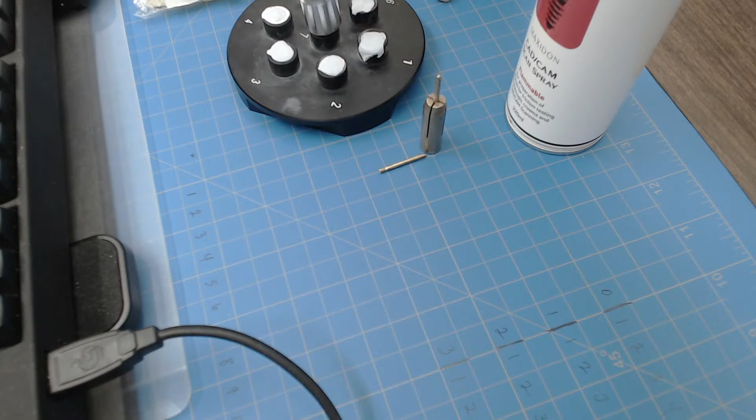All right, so this is the scanner that I have. It's the Freedom HD, a dental scanner. There's a rebranded jewelry version of this, but there's a pretty good markup. Basically, all the jewelry scanners are rebranded dental scanners, and they all come out of South Korea for some reason. So I just went with the straight dental version because I got the trade show price.

I think it was $15,000 two years ago. And really the main difference is the fixtures that you get. So I got all these dental fixtures and I don't need any of them, so I had to make my own. But the other difference is the swing on the arm.

So I like this one because the platform is stable and the camera moves. With something like the Elux, the arm moves and rotates, and if you don't have your piece fixed really well, it could shift slightly - though they have good fixtures, so it's not a problem. But this is more stable for doing stones, because it's hard to affix a stone and have it swing back and forth on an arm and rotate without some jiggle to it.

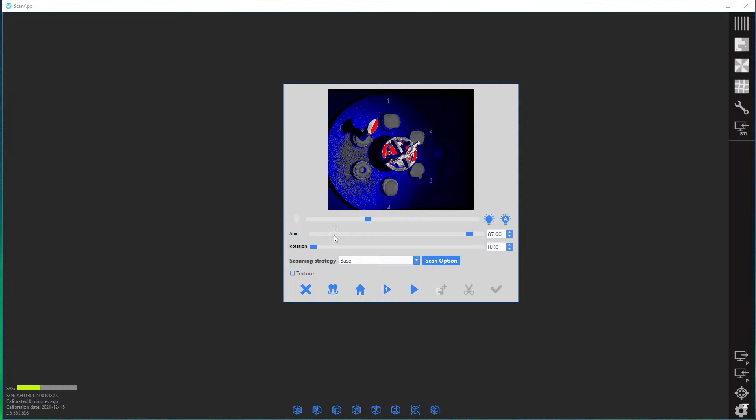And then the second number is your base rotation, so it will spin around. And you can see with having the extra field of view, even though I'm scanning this stone, I'm not taking anything away from the ring. So that's why I can do 7 pieces at the same time, and I just make my center one a little bit taller than everything else.

I just figured this out when I was first playing with it, and it works pretty good. I don't really go above 64 because once you get a top view of something, you pretty much have a top view of it. If I ever need an extra angle, I can take one, but we're just going to use my little base strategy here.

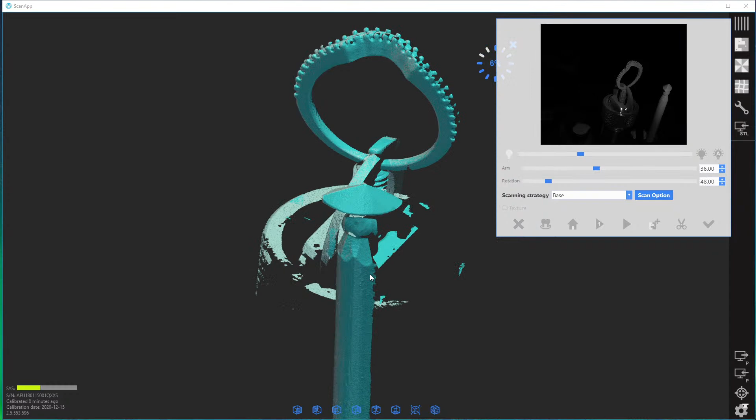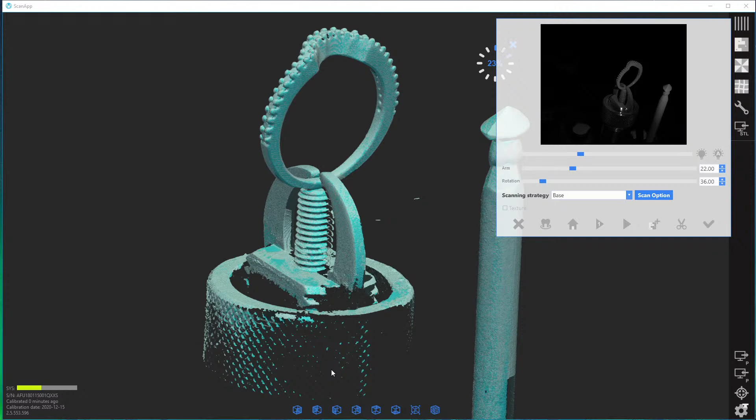This is scan once or do all the steps, so I'm just going to hit that button and then wait. Slide this over, and as it comes up, I didn't coat my little earring holder fully, so some of it's not going to show up because it's a reflective surface. Any reflective surface won't scan, only matte surfaces. That's why you need that Maxidon spray. So we're just going to let it go around.

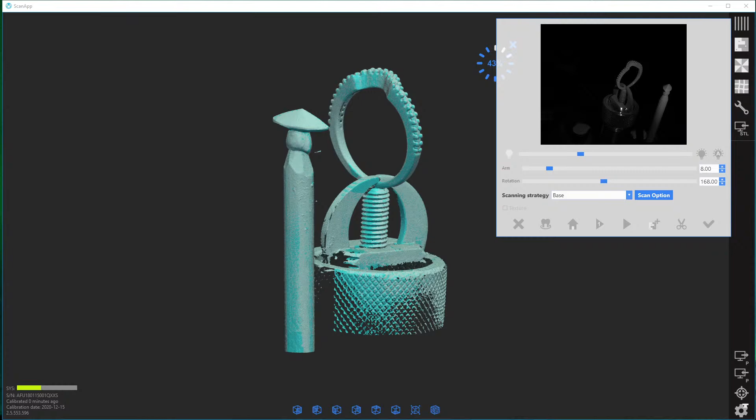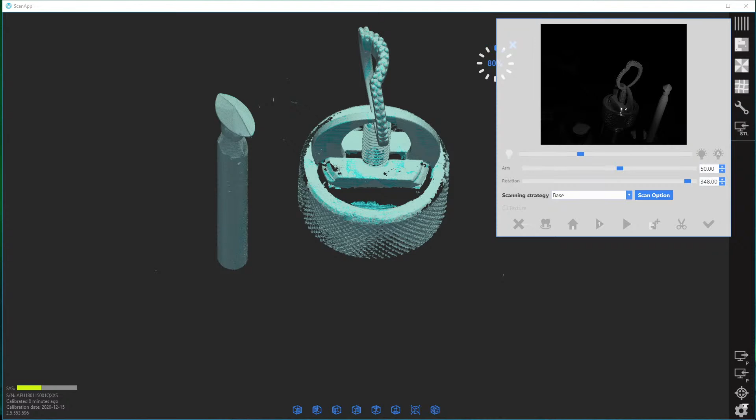Somebody there? In the stream, there's a problem with voice. Is it too loud or is it cutting in and out? Let me turn this on so I can hear myself. Hello? Oh, okay. I think the scanner... did it just start when the scanner started? Okay, okay, I understand what's going on. I'll try not to talk for a minute.

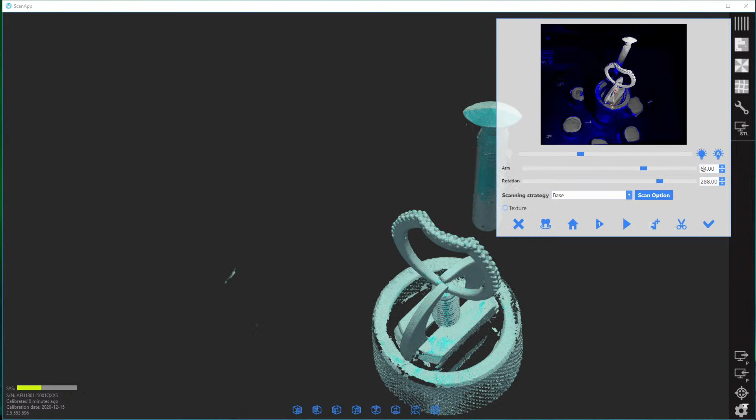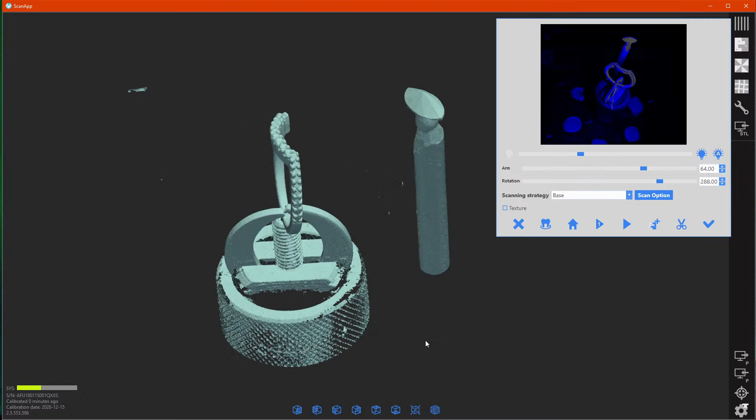You guys can see on that 64-degree angle, you're getting a pretty good top view here. All this little fluff that's showing up is because this is a reflective surface. If I would have fully sprayed down this knurled surface and the base, I wouldn't have these reflections causing these little scatter points to show up randomly out of nowhere. But it's not a problem in the long run, so I don't worry about it too much.

Because you're going to have to cut off your supports, which I'm going to do now. So I'm going to rotate this, and I'm just going to draw a line. Oh, I can't do that because I got two models in here at the same time. Cancel that. We're going to do it like this.

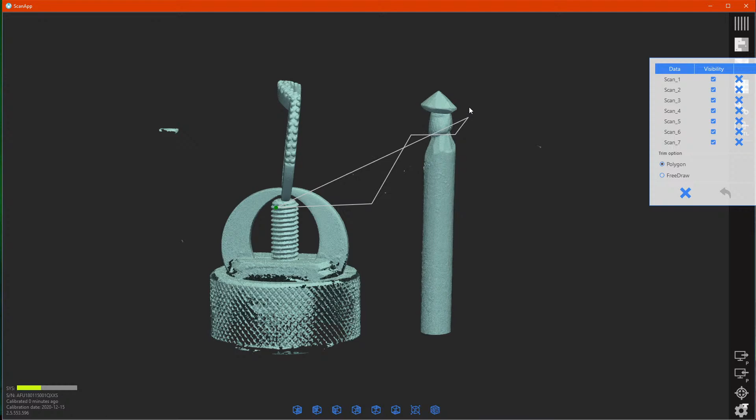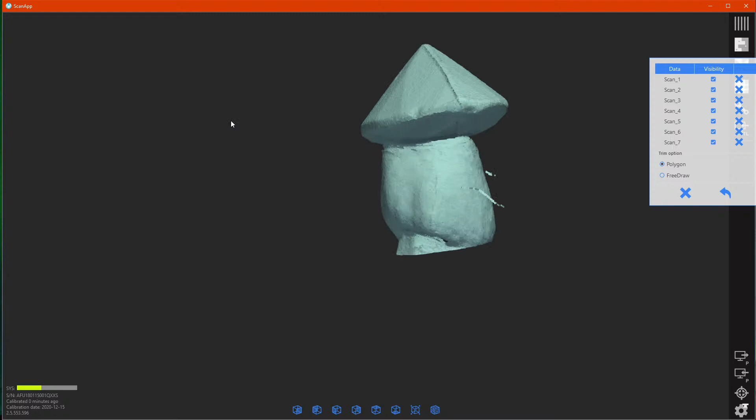I'm going to delete everything on the outside, and then I'm going to look at it. I've got some crud in here, trim the inside, and then I'm going to get in on this and try to get level with the table. Nope.

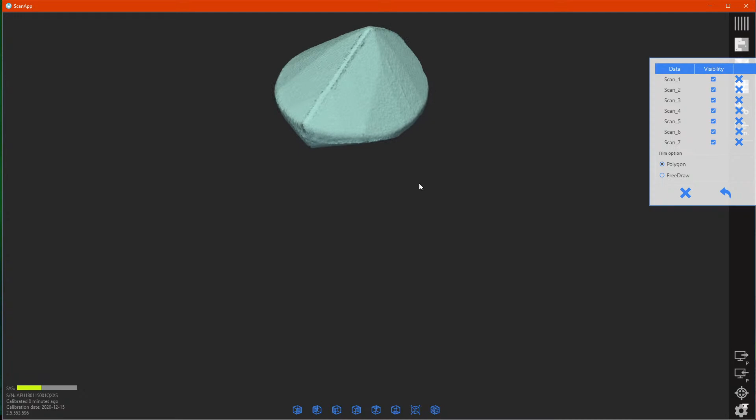Trim inside. And if I was careful, I would take and do that. You can see a little bit of where the spray left a cruddy edge there. It is a spray, it's not perfect. I was talking to somebody yesterday, let me give him a plug because he's a really cool dude.

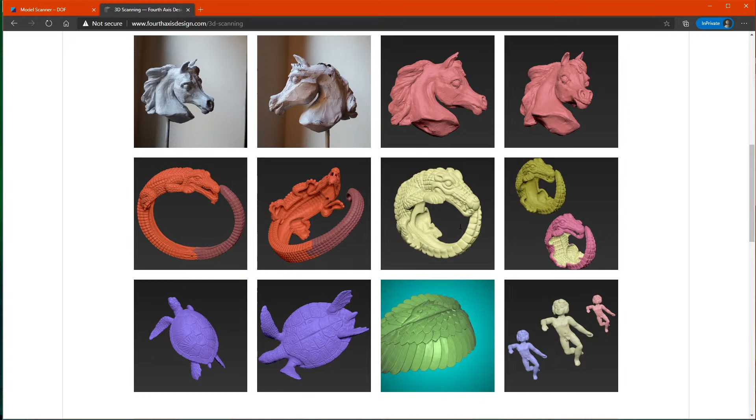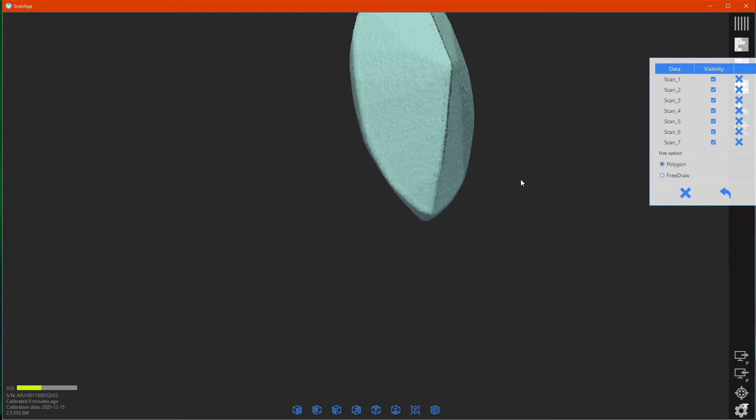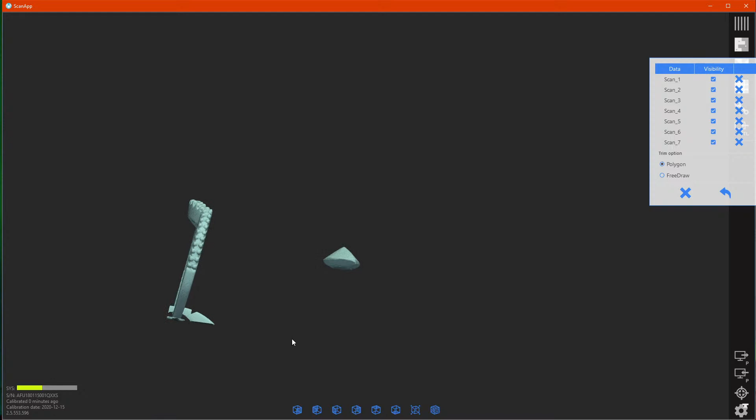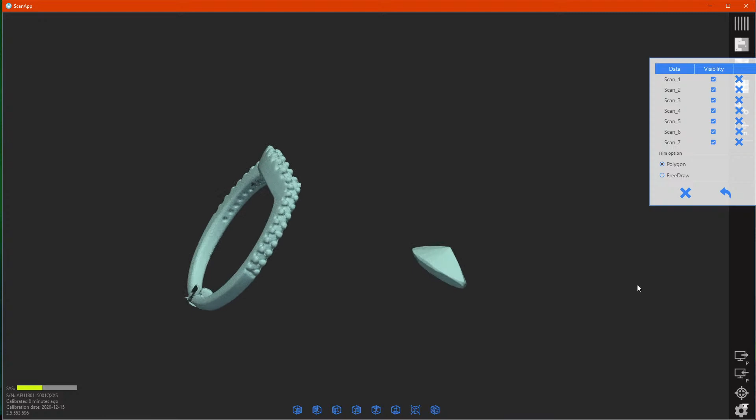Trim inside. And that's all I need because I'm just making a match to this, so I don't need any more detail. Done with that, done with that.

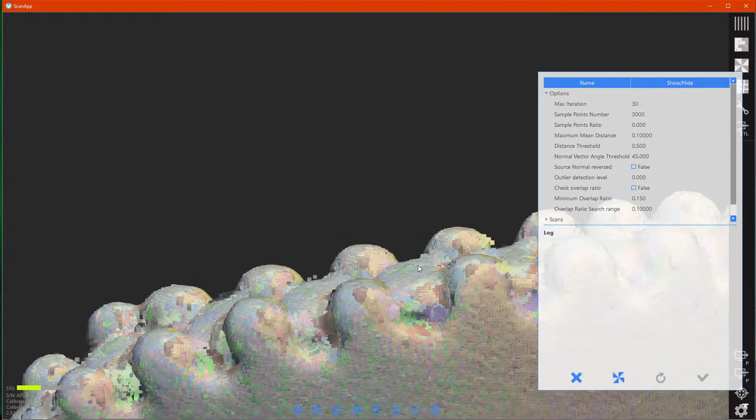Now the next thing is there's a kind of smooth-all in 3D Coat. Each time it took a pass and did a scan, you might get a little bit of a reflection where one of these points is a little off from neighboring points. What this does is where it sees a little bit of a surface anomaly, it'll just smooth it out, and you can specify how much to smooth. I don't have it very aggressive, but any tiny points, it shifts them by a very, very small amount.

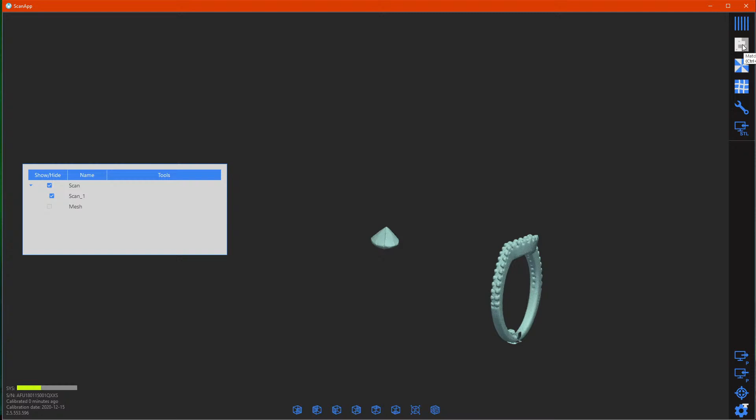After I do that, if I was doing a multi-scan, I would use this match. I only have one scan here, so I don't have match. The match works pretty good on its own, but if I wanted to take an undershot of this, I would lay the part down on its side and I'd end up with two scans, having the ring twice in here, once laying down and once standing up.

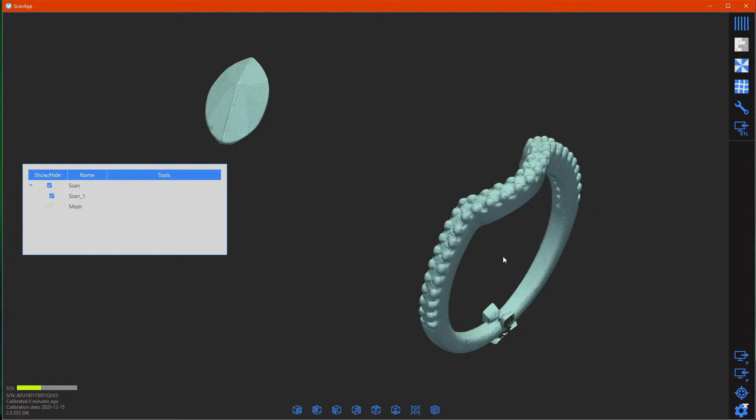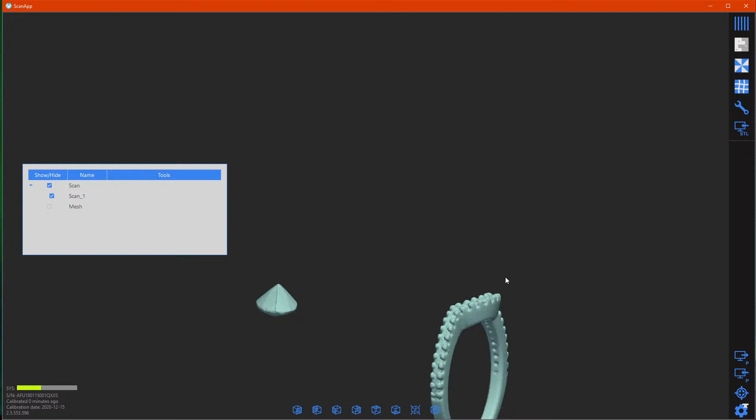This button does a global match. It'll automatically figure out the alignment, but if it gets something wrong, say if you have quad symmetry on a ring, it may not be able to pick up exactly. So I would zoom in on a prong and see, okay, there's a little flat spot here on this prong that's not on any of the others. I'd use a 3-point match, point to it, and then do the same 3-point match on the other, and it mates up perfectly. So if it's a little bit confused, you can tell it what to key off on, and then it will give you a perfect alignment.

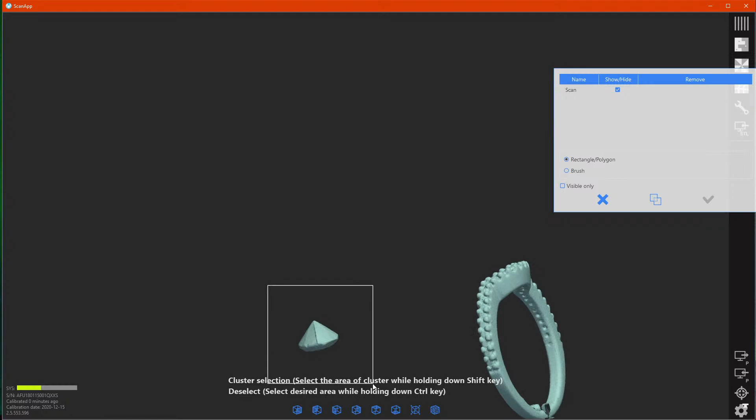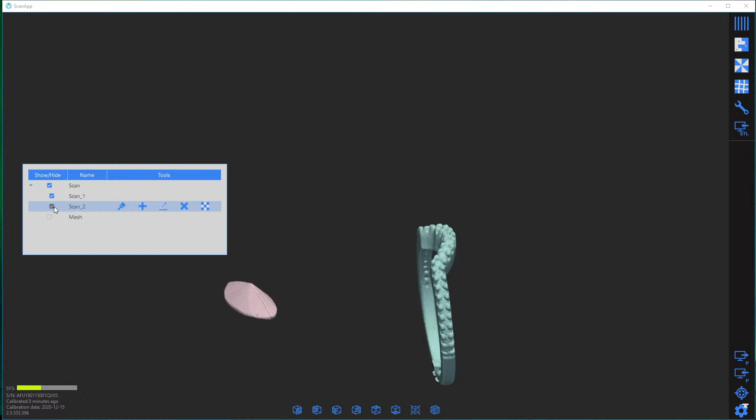Next, we would go into build, but I think there's a way to split. Yeah, you can extract. So I can extract this. And now I have two scans. So I have scan 1 and scan 2, and that's generally what I do. I just put this stone on here. I don't need it. I was just showing you how it works. So I'm going to cut that out. But if I was doing two things at the same time, I would extract them each into their own layer and then work with them from there.

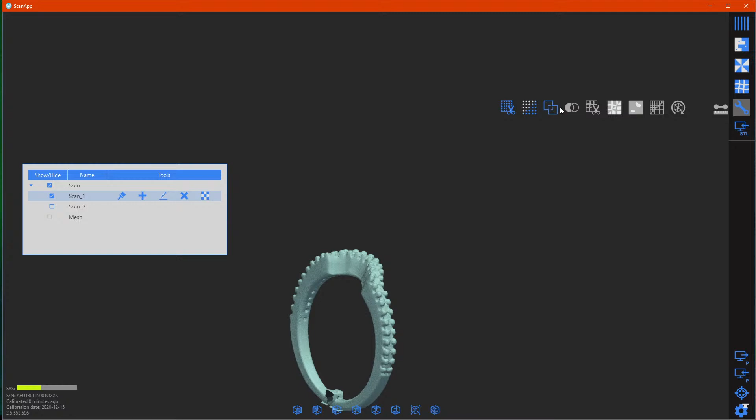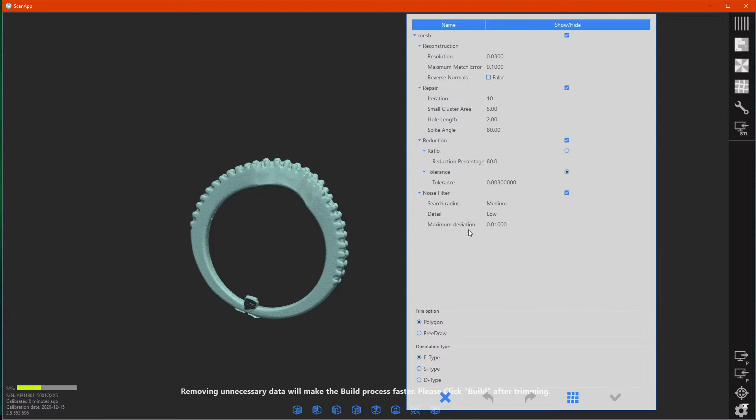Let's go here, and the last thing to do is to turn it into a mesh, which you've got a lot of options here. And this is the one part that I wish there was more information about. I have asked, but I was not very persistent on getting more information on what each of these should be set at. But I feel like this is a pretty good default for most things. And I can zoom in here and see how close the scan is to the mesh.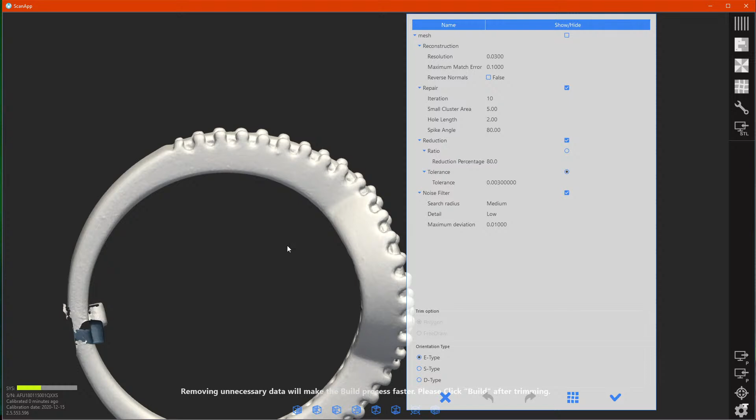So that just pegged my computer doing that analysis. So I didn't talk. I hopefully didn't talk where the mic was getting all choppy.

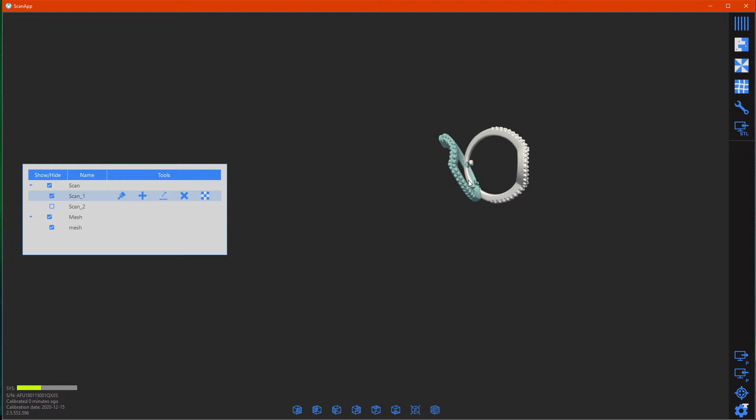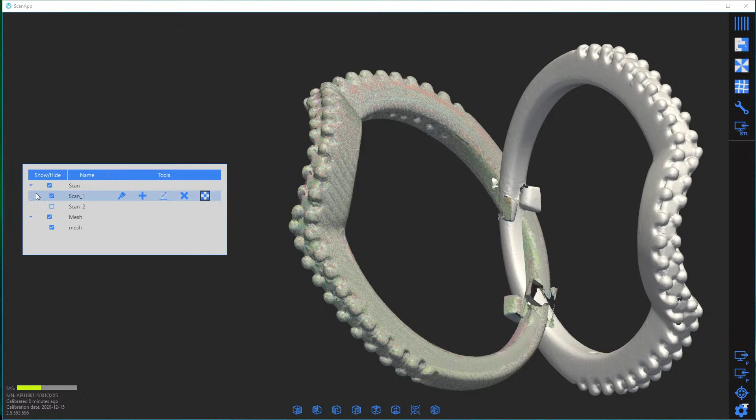But that's the surface, and if I tell it okay, I can come back and look at the scan. Not that one. This one. Oh, they're not in the same place. That's weird. They're usually in the same place, and I can overlay them and make sure that all the detail is there, which it is. I've never had a case where it wasn't. So I guess in this latest version, the mesh just gets put in a weird spot. Not sure why that is, but that's it.

Once I get the mesh, I export to STL, which I don't want to show file names on the stream. So 1 second. Okay, so I save that out to an STL file.

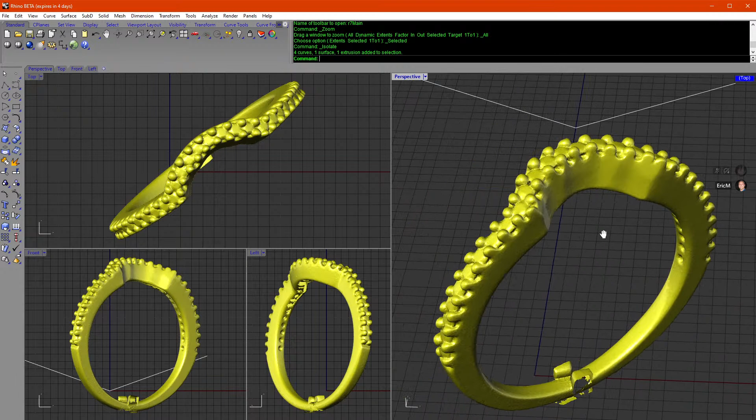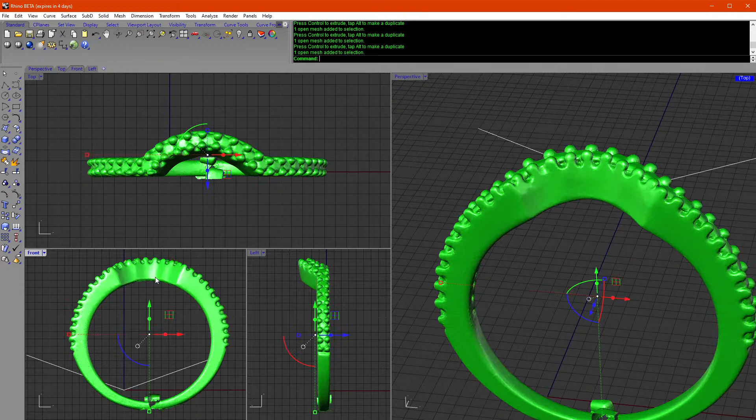And I'm going to make this all shaded mode and isolate it. And here it is in Rhino, where I'm pretty much on my own at this point, as far as getting this turned to 0, which is never fun. And there are some scanning tools, plugins for Rhino, but I have not heard great things about any of them, and they're expensive, and I don't think the cost is worth trying to pick one of them up and spend time learning it when I can get a pretty good job doing it like this.

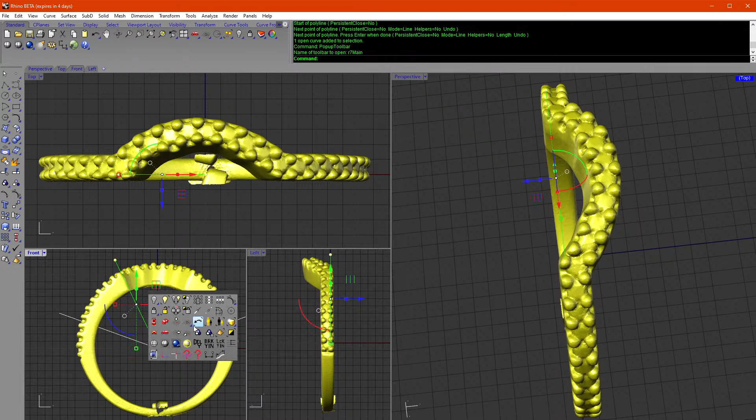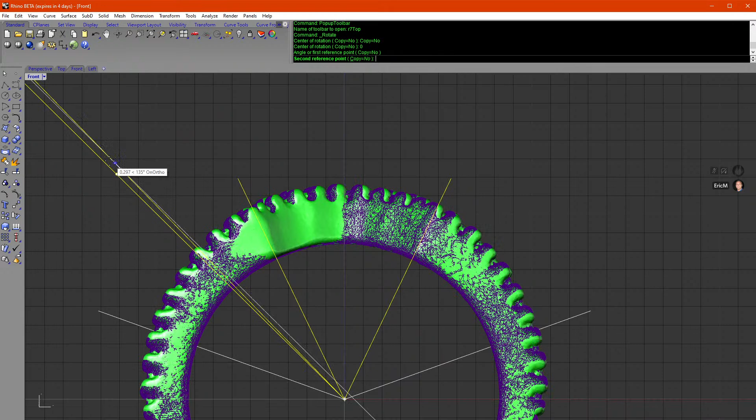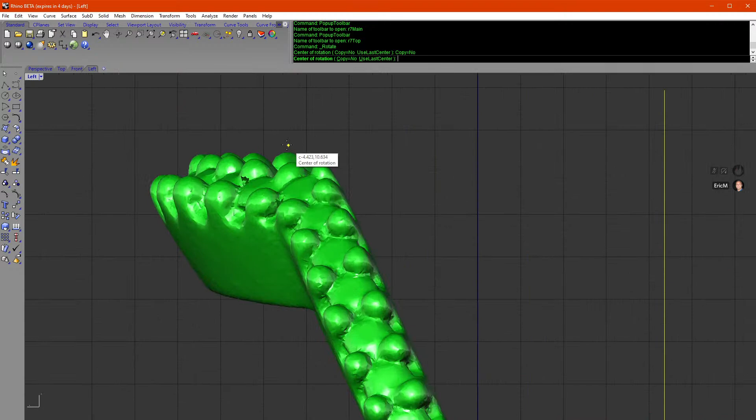I usually draw a couple of reference lines, like there's this here, and I'll mirror that over to the other side and drag that in front of the camera. And I usually put this on a darker layer so I can see my lines better. But I'll take and rotate this. So rotate off of 0 just a little bit. And that looks like there's the same amount of spacing on both sides. And then on the left, I'll exaggerate it and say rotate from this point and draw a line right down the center of it. And then snap lock it to 90.

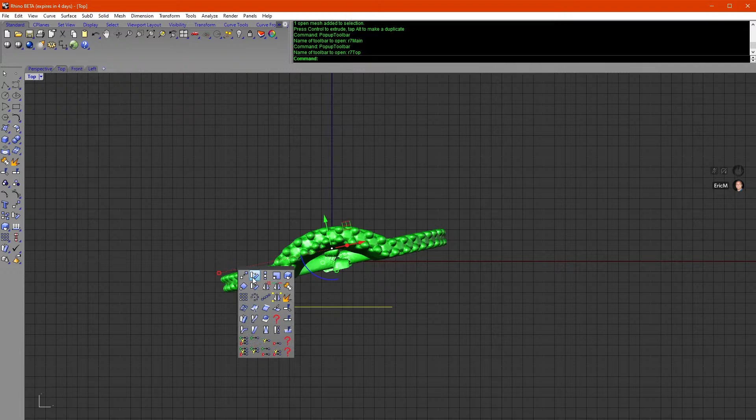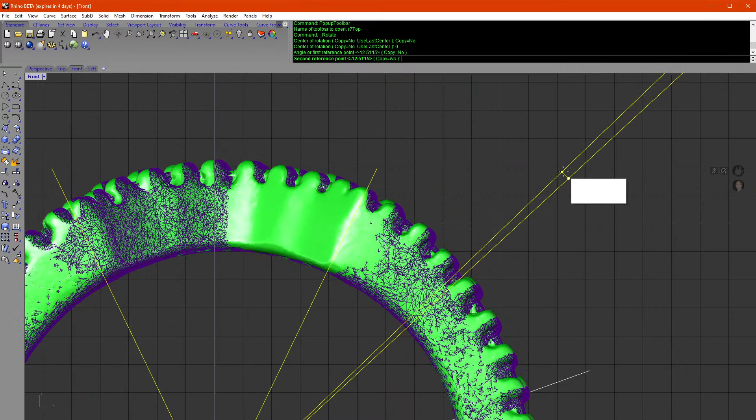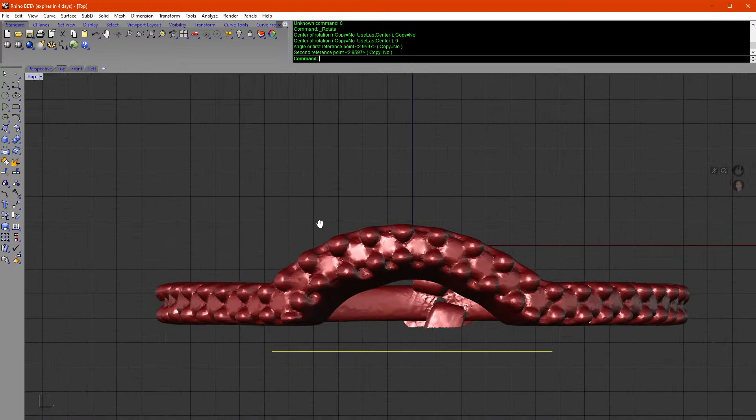And then on the top, we'll do the same thing. We'll exaggerate it. And then rotate, put a line dead down the middle, and then snap lock it to 90, and then check our front alignment because we've gone a little bit off center. So we're going to rotate off of 0. A little too far. No, we are way off on that. Let me use a multi-view here.

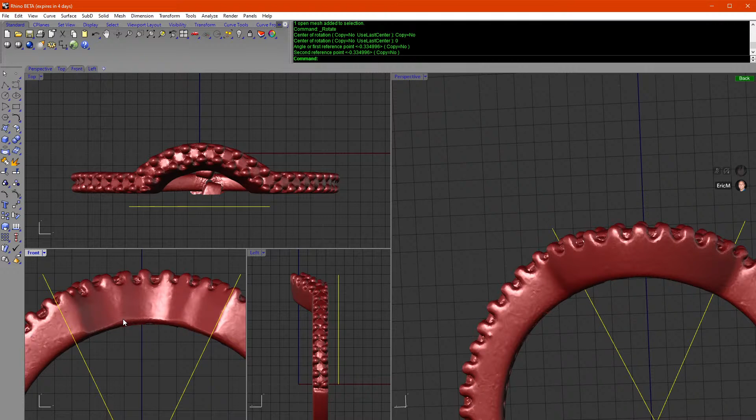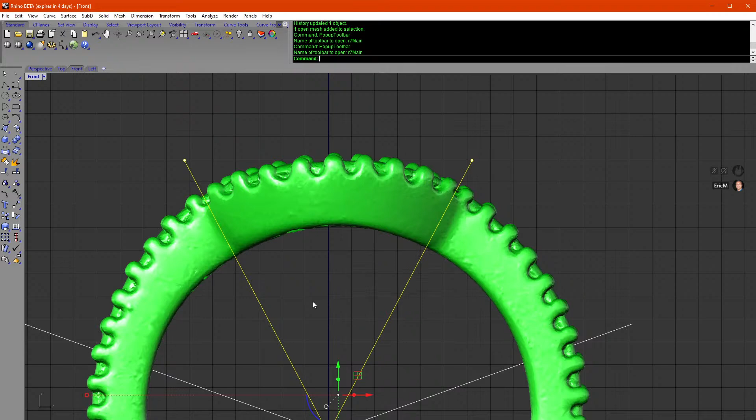Is my shading mode? Oh, I'm looking at the inside versus the outside. Flip this around 180. Yeah, this is the thing I hate about scanning, is just getting it lined up. And part of that is that you'll never get a ring back in where this is a completely straight shank. Once it leaves and enters the world and gets banged up, a lot of times these will get twisted. So you just do the best you can. You get it close enough and don't drive yourself crazy trying to get a perfect alignment. But that's pretty much it.